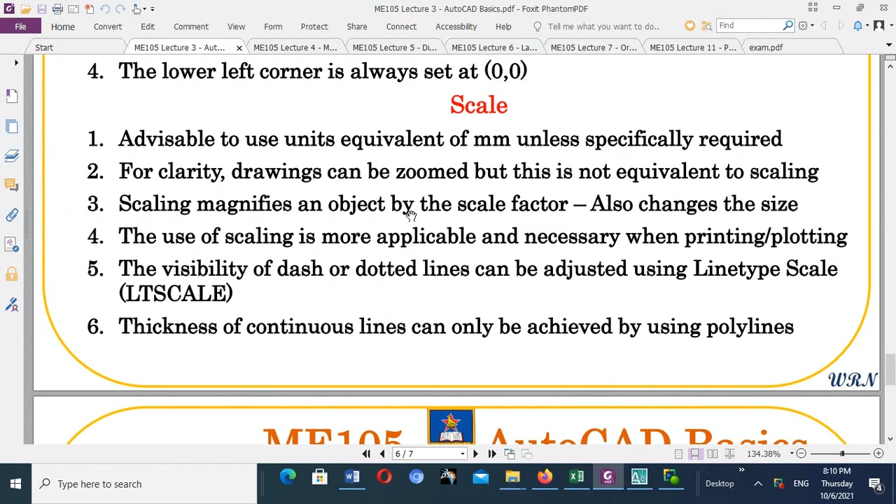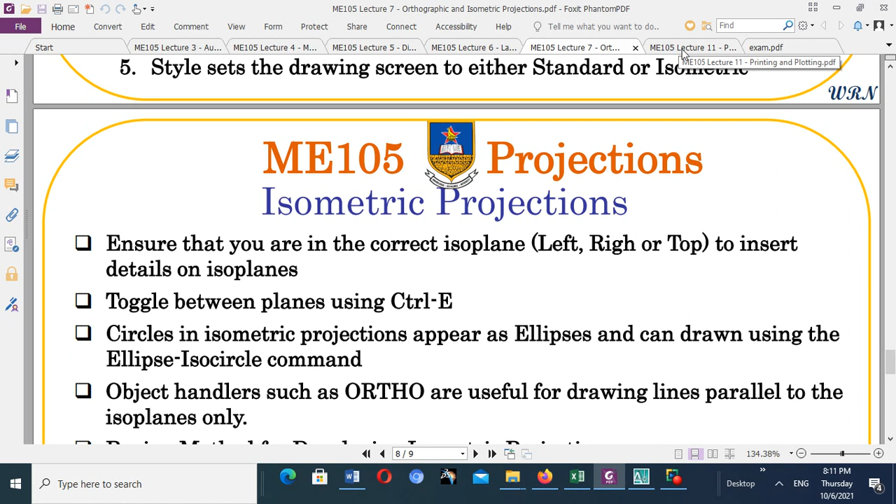We want to proceed with our learning from the last tutorials. I think I gave you 2 tutorials. So we will continue. Most of the things we discussed are in the PPTs that I sent, which should guide you: lecture 3, lecture 4, lecture 5, lecture 6, lecture 7, lecture 11. So we will try and make sure we cover this, show you on the PPT and also go on AutoCAD itself.

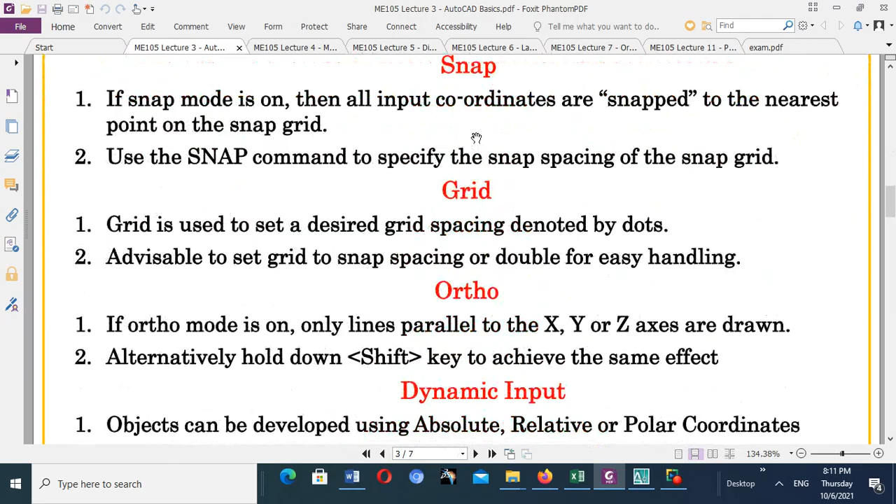So most of these things I talked about. I talked about this window, the AutoCAD screen. Then the display, keyboard, your mouse, the left hand button, right hand button, and the middle button. Snap on. You try these keys and see the effect: snap on, snap off, grid on, grid off, ortho on, ortho off. And these notes may also tell you more about those menus.

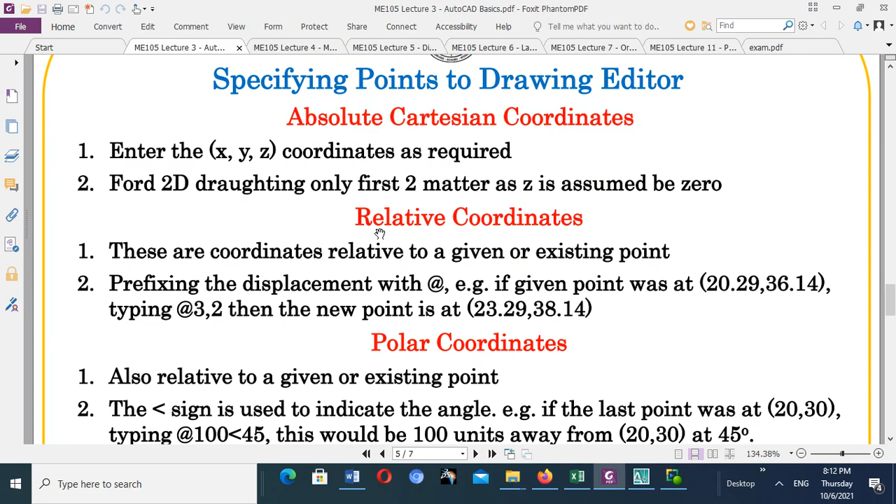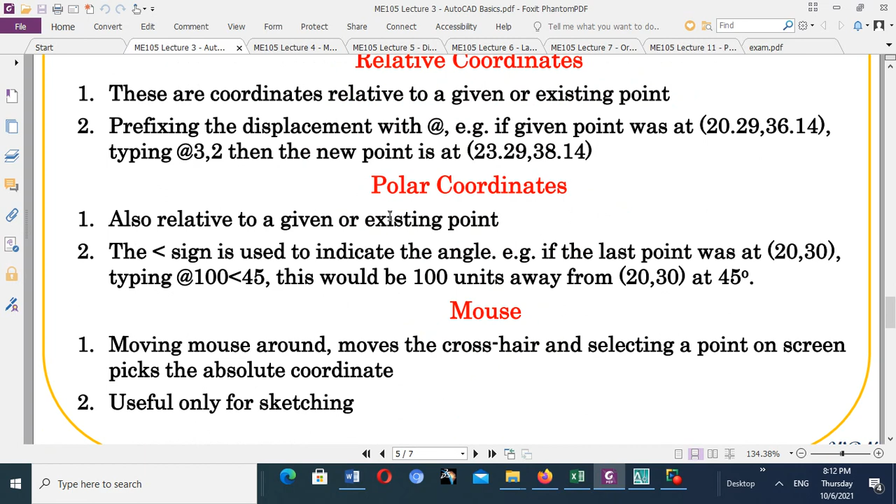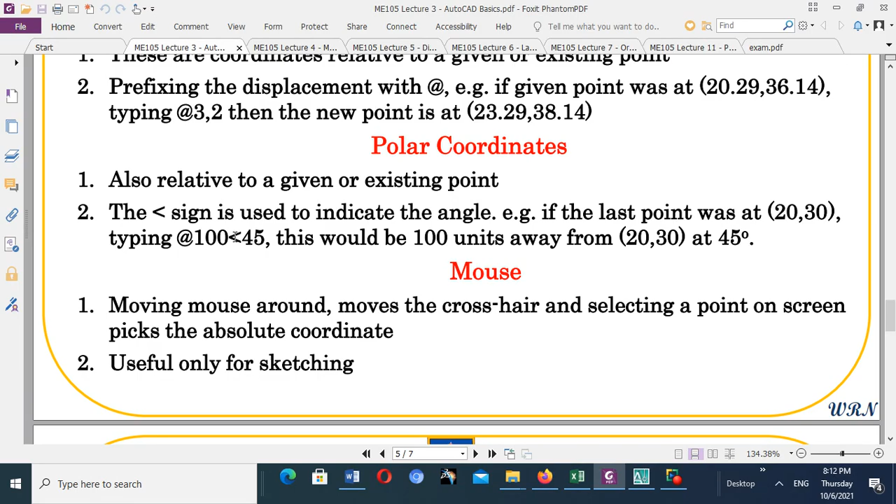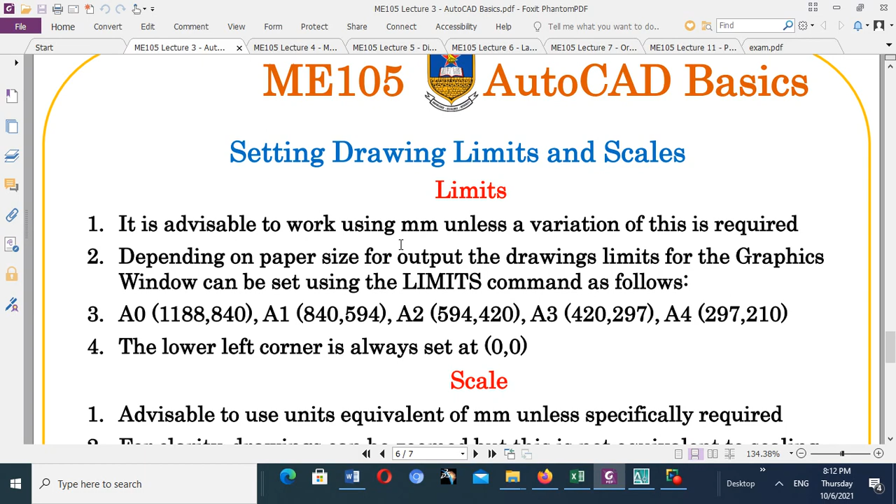Then there's specifying points, drawing editor, absolute Cartesian coordinates, relative. I showed you how to draw relative where you use the @ sign and then put your coordinates. Then polar coordinates: @100, where 100 is the length of the line, then the smaller than sign, 45 means angle 45. Right? Then limits. Normally we set limits according to the overall size of the drawing we want to draw.

But you can just draw straight without putting any limits, because you adjust your drawing according to the paper size that you choose. But anyhow, you must know these limits. If you want to set an A4 size, these are the coordinates of the upper limit. The lower limit is always 0, 0. A4 size is 297 mm by 210. A3 is 420 by 297. Then A2, A1, A0, maybe for plans.

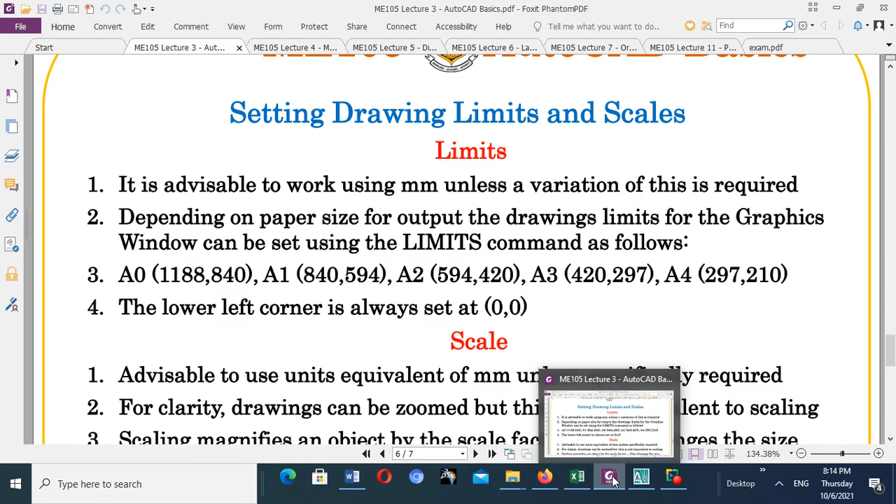So if you want to set a limit, you go to AutoCAD and write limits in the command prompt. Press enter. It asks for the lower left corner, 0, 0. You press enter. The upper limit default is 420 by 297. If you want 297 by 210, you type it and press enter. It becomes your paper size. But as I said, you don't need to do this. You choose your paper size at the printing stage.

Same thing with scale. You normally draw at 1:1, and then you scale according to your paper size. Saving your drawings in AutoCAD: you can save so that it can be opened by AutoCAD itself, or in other software like Paintbrush, Windows Metafile, Encapsulated PostScript file, American Standard Code for Information Interchange. These are the formats by which other software can open it.

Normally I use manufacturing software like Mastercam, so you want to save it in a format which Mastercam can open. Sometimes you want to save it in a format for a special type of printer, maybe stereolithography, that the printer will accept. So if you come here, say we had drawn something like this, right? This is our drawing 12575 surface.

So here are the file types, right? This is AutoCAD 2007. It doesn't have many types, but this DXF is interchangeable with other software. So if you want it opened in other software, you save it as DXF. Then DWG, that's the AutoCAD format; the AutoCAD file will end with DWG. But DXF is for interchange with other software, right?

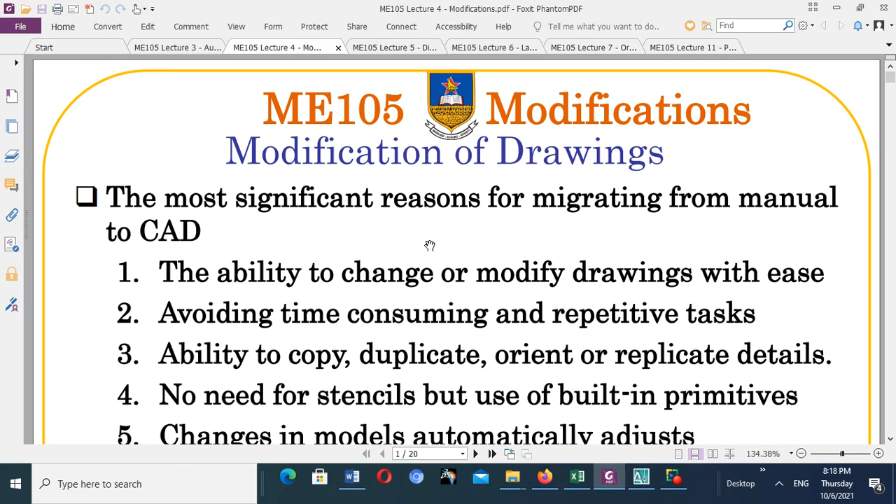And we go back to our PPT. So that's about it for this slide. We go to this one. On this slide we did quite a lot about modifications. I still want to practically introduce you to those which I left out. You as engineers, your IQ is very high. We introduce you a little, then expect you to discover on your own. But let's tackle other modification commands. So we go to AutoCAD.

First one is erase. We press erase, select object, this object. I've selected, then I press enter on the keyboard, and it's erased. See? You don't have to use a rubber like in manual drawing, which is old-fashioned. Copy, we talked about copy. Mirror, we talked about mirror. Offset, we did. Array, I think I did array. Move, rotate, we did.

And as I was saying, you can team up as friends, you practice these things. If you have got any problems, inbox me, phone me. I will always be there to help you.

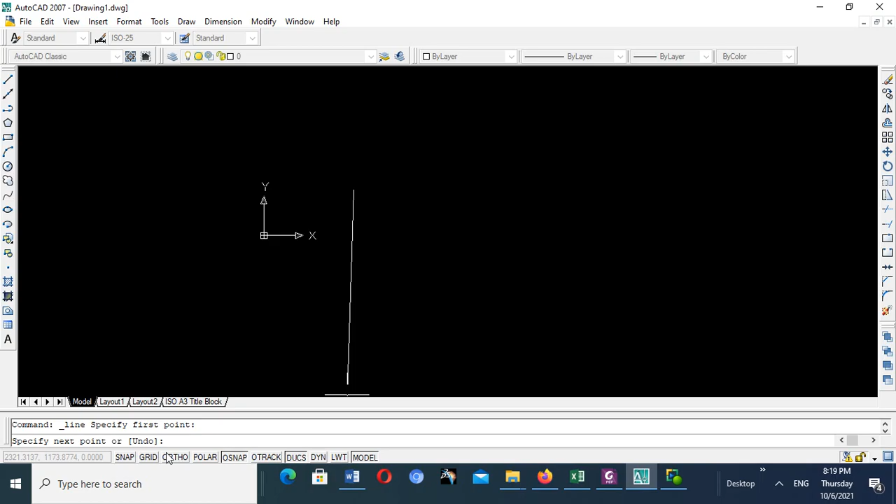Scale, stretch, trim, we did this. Break, maybe break we didn't. So if we draw a line, this is a straight line, we put in ortho, ortho on, this is our line. Alright, this is one entity. If I break it, if I try to highlight it after breaking, it will highlight two entities.

So I go on break at point. Select object to break. Select first breakpoint. See, it's showing osnap is off. I put it off. Then I just select this break, or even by the cross here, by one of the hairs, I just click it.

Then I try to find out if it's really broken. You see, this is now being highlighted separately from this one, so it has been broken by using this command called break at point.

Then there's another type of break. You see this break, it broke a line, but they remained coincident and they meet at a point. But if you break with this command here, you break in such a way that there's a gap left in between. So let's try that.

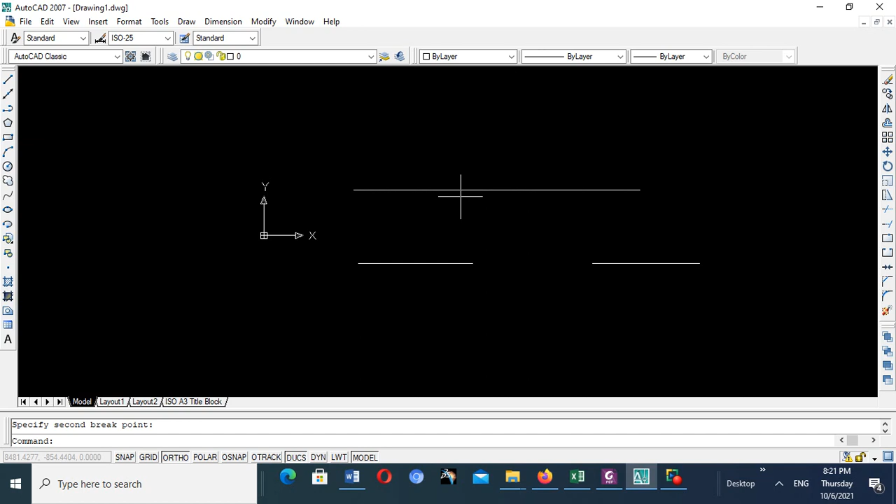Command break. And there's this command called join. We remember we broke these two lines. Let us say we want to join them again. So we click join. Then they say select source object. This is our source object. Then they say select lines to join to source. This is the line to join to source. Press enter. You check, it has become one.

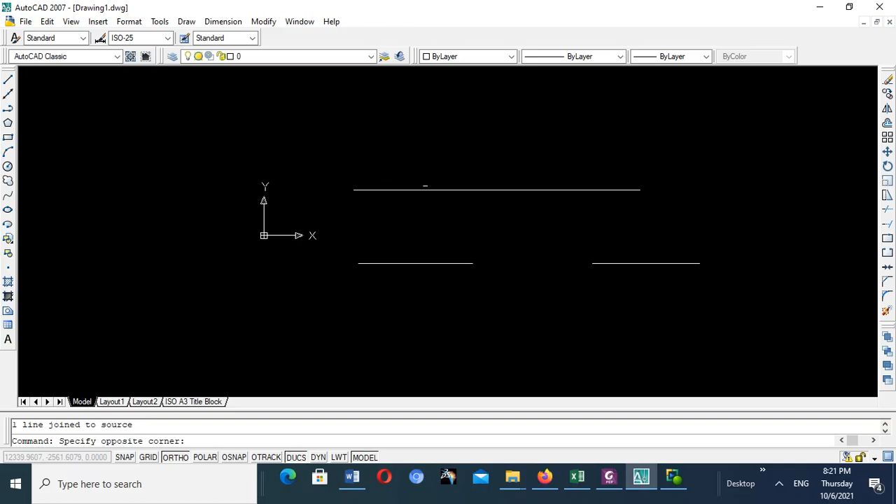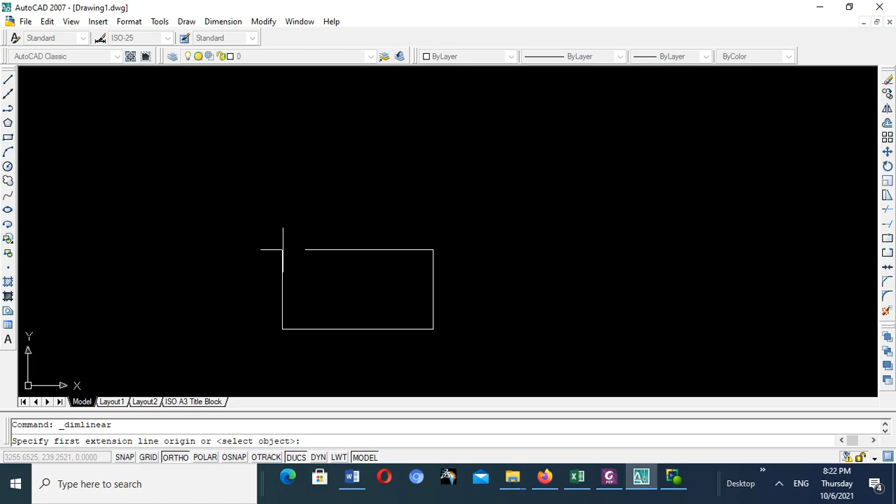That's how we've gone through join. So we delete this. We've learned our lesson. Then let us say we have got a rectangle like this, right? Let me try to see its approximate size. I've just drawn it. Yeah, it's about 900 something, right? Good. So I zoom it for size.

So we want to try this. This is our rectangle. If you want to chamfer this corner here, or you want to fillet this corner here, this rectangle has to be exploded so that each side is not joined to the other. It's independent. So use this command called explode. Select objects. This is the object I want to explode. Then I say enter. If you check now, each side is on its own.

Now we can do these operations, chamfer and fillet. Already we have learned what explode is, right? So let's go. Chamfer. Then they say select first line or undo or polyline or distance or angle or trim or method or multiple. So you see, they guide you to the type of chamfer you want. The popular one is D.

So you go D. If distance, you just type D. If it was a polyline, you type P. If it was undo, you type U. If it's an angle type of parameter, you type A. If trim, you type T. If it's method, you type E. If it's multiple, you type M. So we'll go D. This I leave you to practice. You try them out: method, multiple, trim, type of chamfer, right?

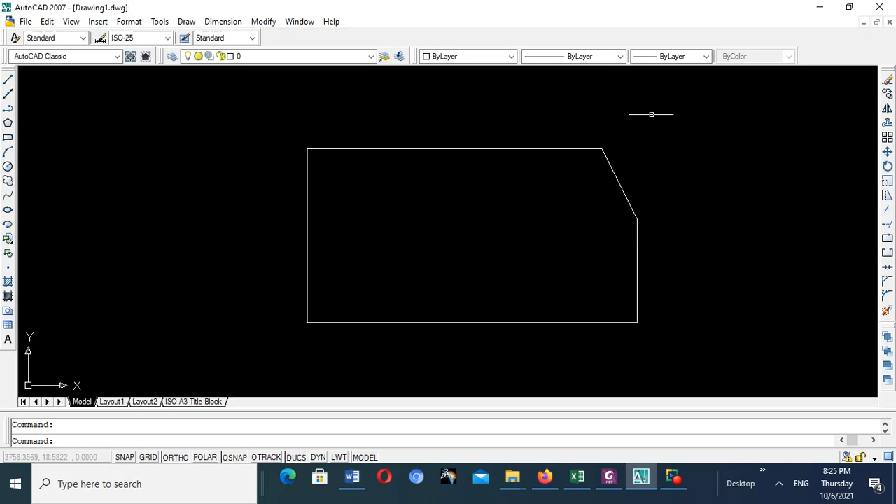Now remember the distances that we chose. The 100 is from the corner that was deleted to this. The 200 is from the corner that was deleted to this. There is your chamfer, right? So you can undo that. You can just press U, enter on the keyboard, right? Then you want to practice fillet.

So many types of fillets: undo, polyline, radius, trim, multiple. The default which is already there is a radius type of fillet, and the radius is 20.

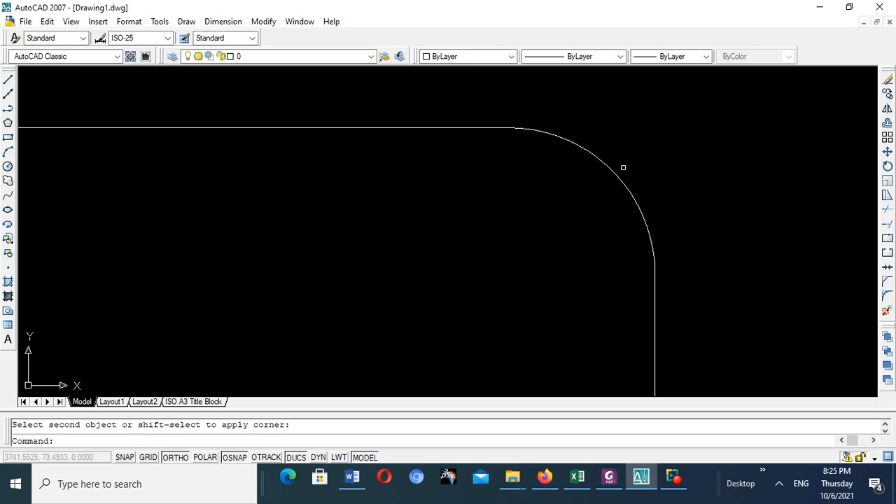So let us say we want to put a new radius. Type R and we put a new radius. Say our radius is 200 or 100. Enter. Then we select the first line, select the second one. There is our shape, our fillet, sorry.

Right? Good. So you can undo fillets. You press U on the keyboard and press enter. U enter. Then you undo your fillet. So we have learned all this.

Then you want to learn extend. You delete this. While we are there, I want to teach you something. There is an icon here written region. What does the region do? It joins the lines that are independent to make them one entity. So what you do, you just click region.

Say select object. These are the objects that I want to region to make them one. And I press enter. Check. Now it is one. And if I want to explode that, I just press explode. Then I select the object. This is the object that I want to explode. Enter. If you check, now it is exploded. Alright? So you have learned this is the opposite of this.

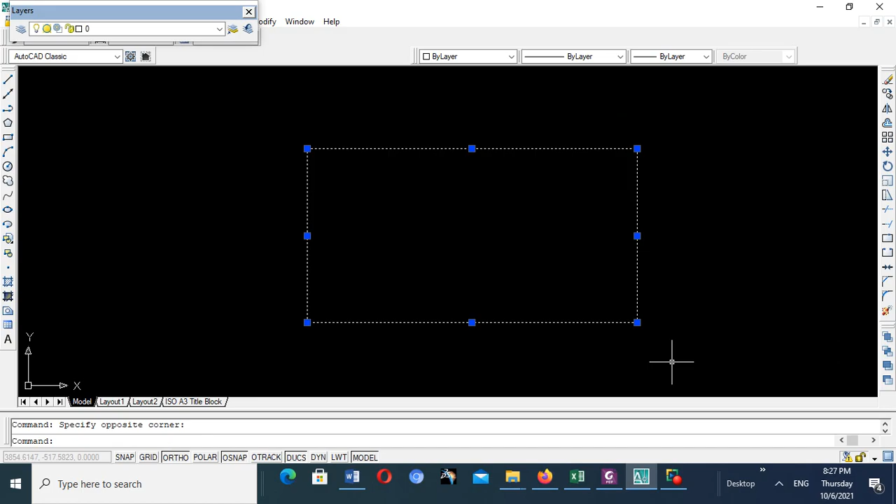Good. So we delete this. Then, last time I taught you trim. Today I'm going to teach you extend. So I will draw some lines here. I would like to draw a polyline, line, okay?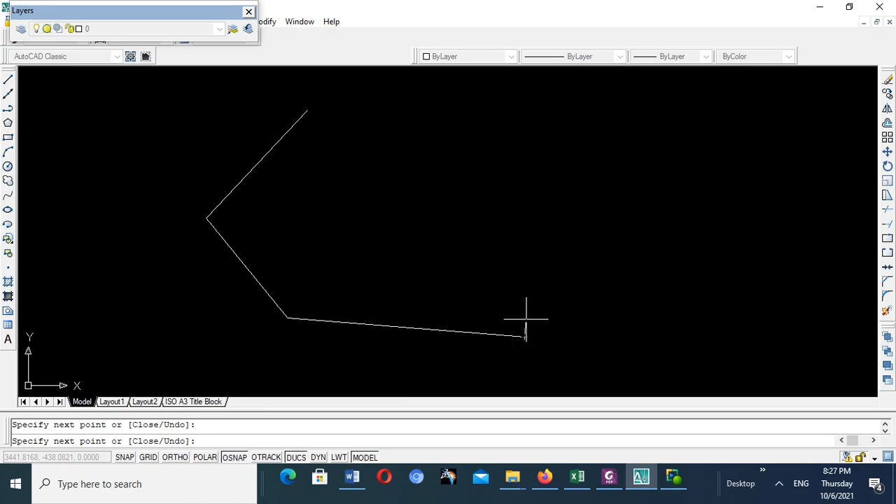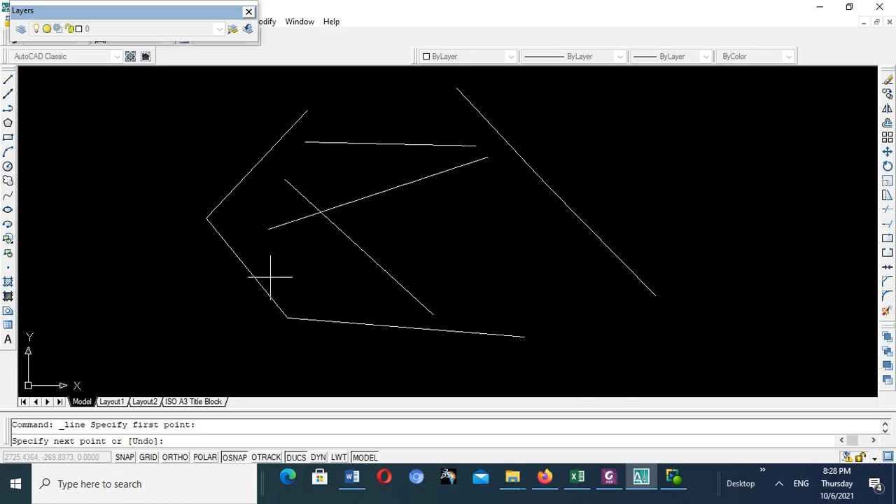So now let me remove this auto. And I draw another one there. And then like this. And I draw, and then draw another one there. And I draw another. Yeah, I want to illustrate this extend command.

Check extend. And it says select the boundary edges. So boundary edges are the lines to which the lines which are going to be extended are going to be extended to. So here is one boundary, is another one, is another one, is another one. So you press enter.

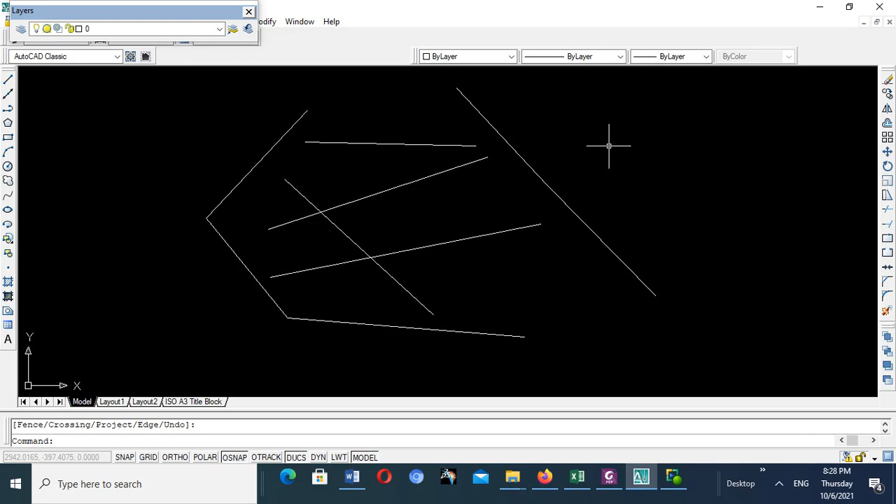Then you have selected your fences. No, let me start again. So we go extend, right? Then select the boundaries. These are the boundaries. This is where we put our extend limits.

So boundaries. Then they say select object to extend or shift. So I want to extend this line to that boundary. Boundary has already been extended. So if I want to extend this line to that boundary, I just click on the side nearer to that line. Then this will be extended. If I click here, this side will be extended to that one.

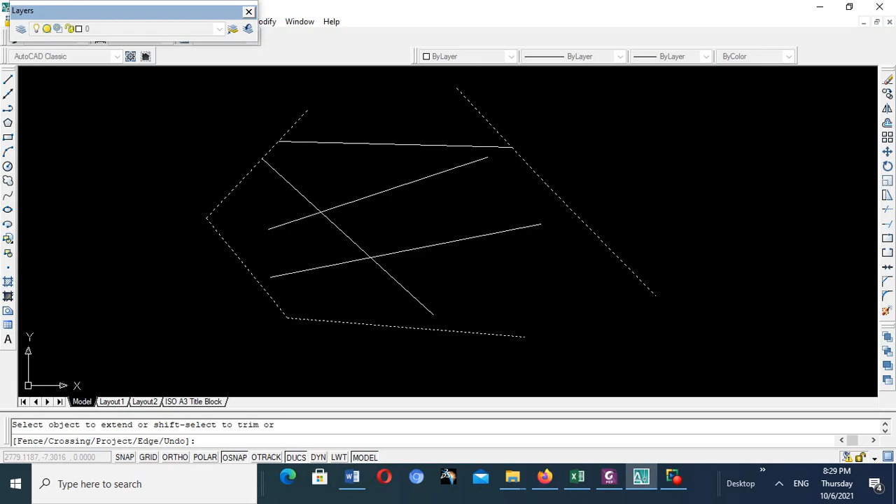If I click this one on this other side, it will be extended there. If I click it here, it will be extended there. Watch. This extension, this extension, this extension, this extension, this is our extension. You see? This is how you use your command extend, right? So come out with that command.

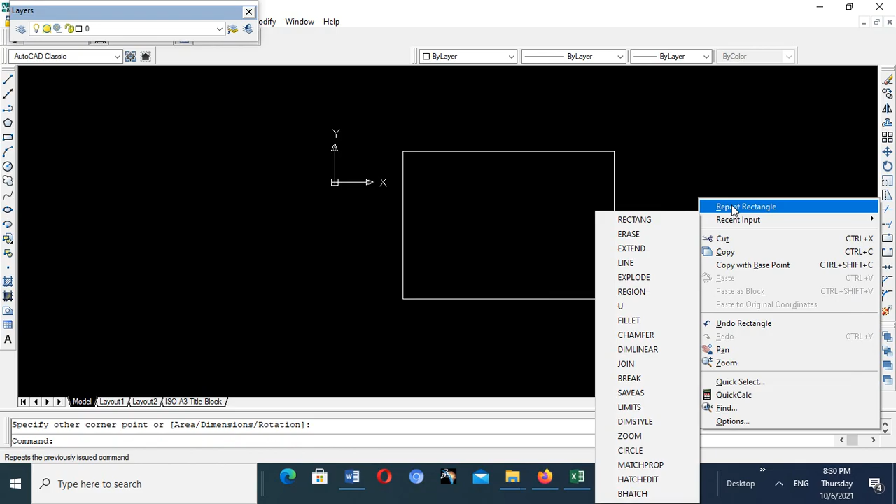So we have done our modification, most of the modification. Then we want to practice hatching. So we draw a rectangle like this. You know, hatching, you people did manual drawing. What is the purpose of hatching? I won't tell you, you should know that. This is what we call assumed knowledge, right?

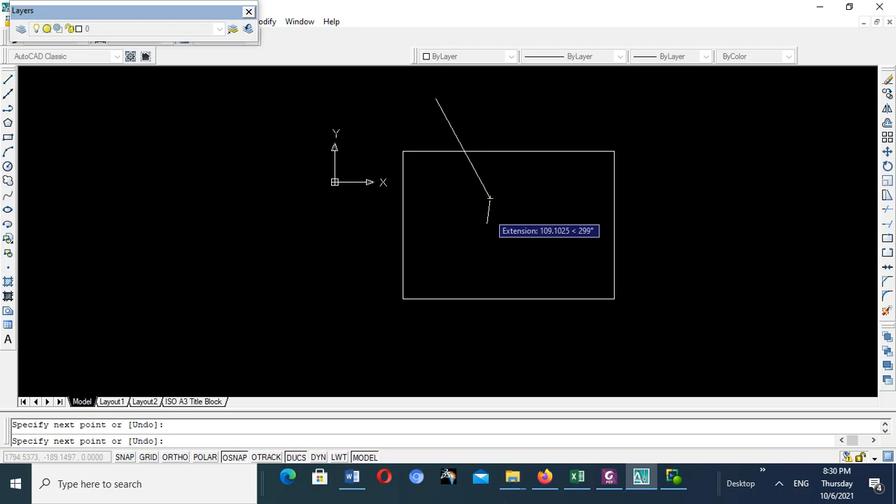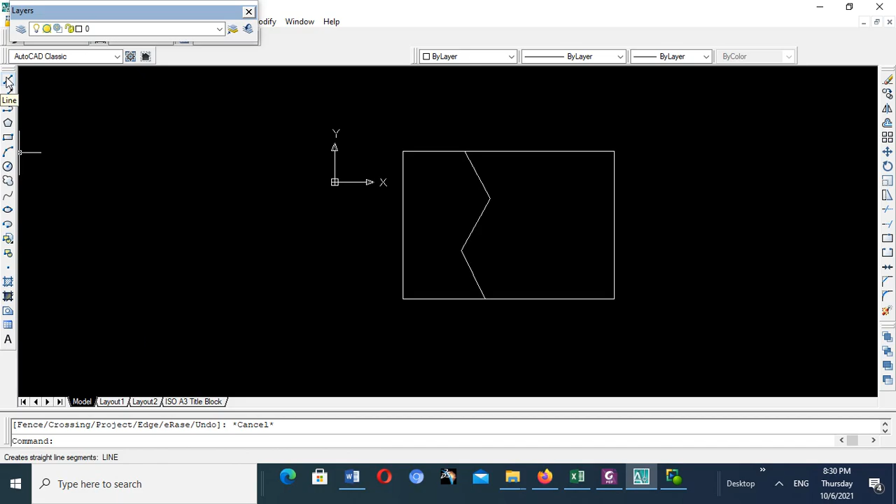Take this. Now, if you draw a line like this, let us say it was a little shape like this, right? Then I trim it, TR, and enter. I taught you how to trim, short command for trim, right? Then let us say there is another boundary here. Alright, then we use the command for trim, tr, and enter. Trim that.

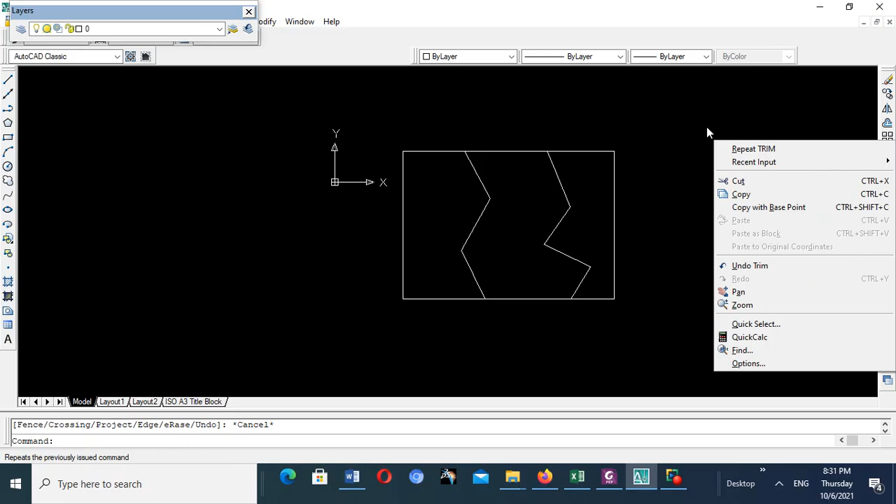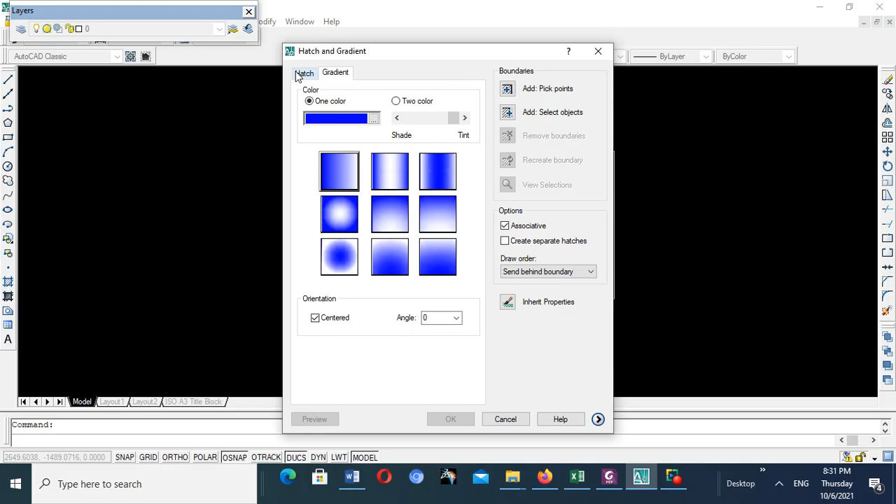Right, good. Then we want to practice hatching. So we go to here, the H icon. Then we go H. Sorry, what is happening? Yeah, don't know where that error came from. So if you click H, that H pop-up window comes. If you want to hatch, normal hatch, you can go by gradient, which is the gradient of colors. If you want to go by hatch, you practice this. So check this hatch. Alright, so there are so many hatch types.

You can click here and you see the types. This is the ANSI one, this is the ISO, this is predefined, other predefined custom where you make yours. So you choose from this. See the hatch type, and this is the hatch scale. I'll tell you how this is important.

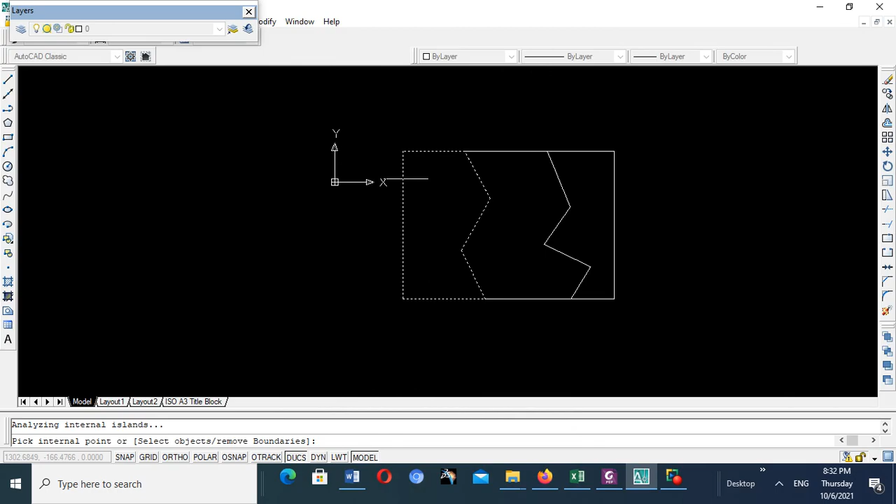Then they say add pick points, select objects. So if you pick points, if you pick this one and you pick this region, by the boundary it is going to be hatched. Then you press enter. You haven't finished. You have not yet selected the hatch type. So you can go here, you click the type, you can go from ISO, you go to other predefined.

Let us say you are an architect and you want to select a hatch for a roof. This is a roof type. This is a roof, this will be suitable for roof. For brick, you can show. For the mechanical guys, the hatch maybe use this to show a section of a shaft or an assembly. So let us use this architect one. Then I say okay.

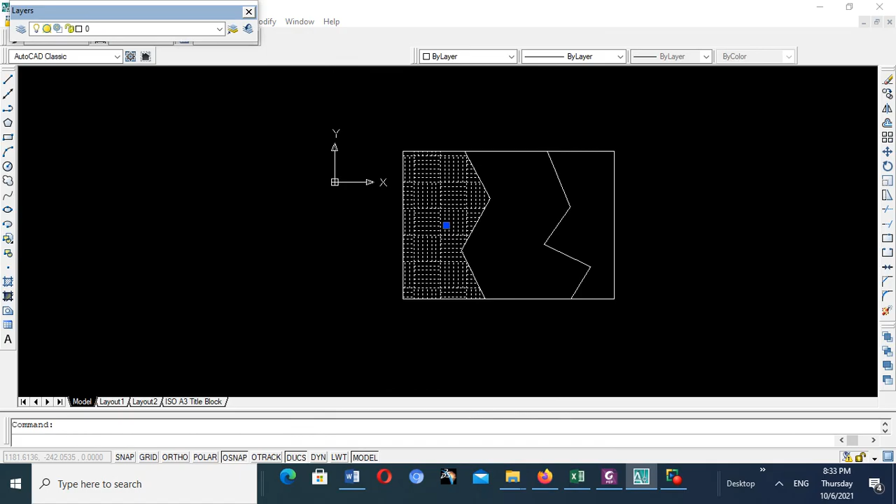Okay, there is your H. If you click it, you want to edit it and change its scale. Let's say you put a scale of 20. Say okay, check - the H becomes too big, like not an H anymore.

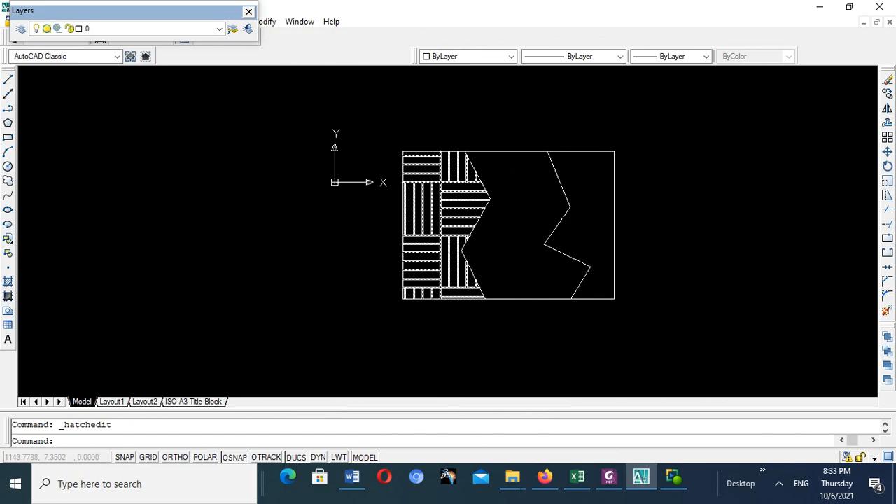So you click it again, then change the scale to a suitable one, to what it was set to. There's your H. I click again, it was on 1, I go 1, and I go okay, then it becomes nice, right?

Again, also H this part, so I click H. Let's say I just want to show you another type of H, so you select the pattern from this. If you go here, it goes by names - these names you might not know. Eighth, you won't know what an eighth is. But if you go to this section, you can see the type of H and the name associated.

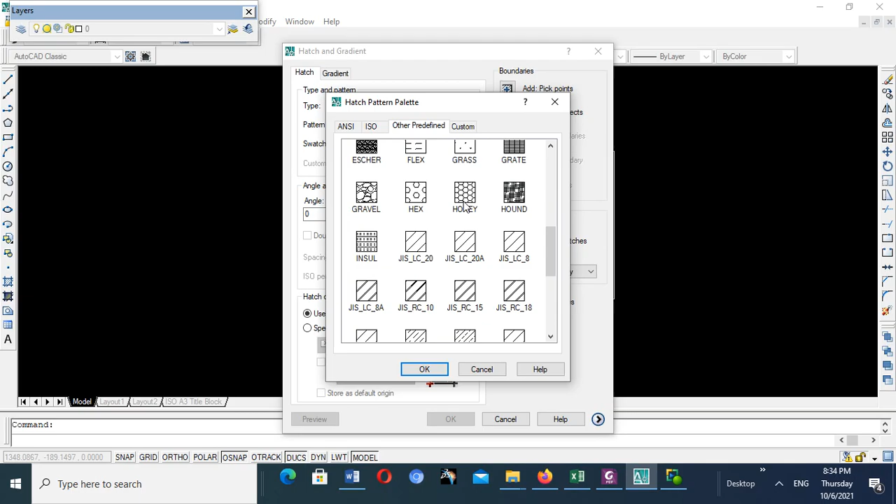Then we pick the points, we pick this region and press enter. Then we say okay, that is our H, but it's not good enough - you see the scale is not well adjusted, so it doesn't come out clear. So you double click it, the pop-up, the H edit will come.

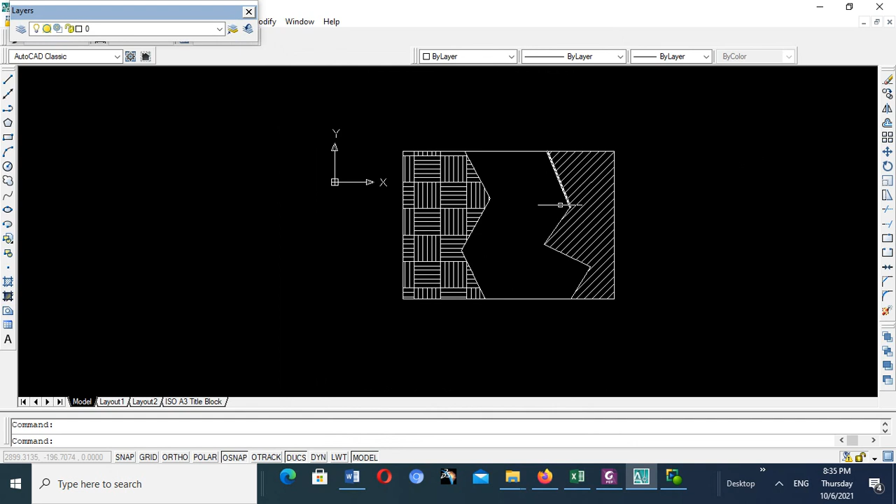Then you change the scale - this means the scale should change. If it's too small like that, you can make it a bigger scale. So you go okay, see how your H has come. Bigger scale, the more spaced the lines are. That's your H.

Practice, so we've done all this. There is no question about that. Modifications, the H we have done. Then there's something called the P-edit. Some of the things I would like to practice on your own.

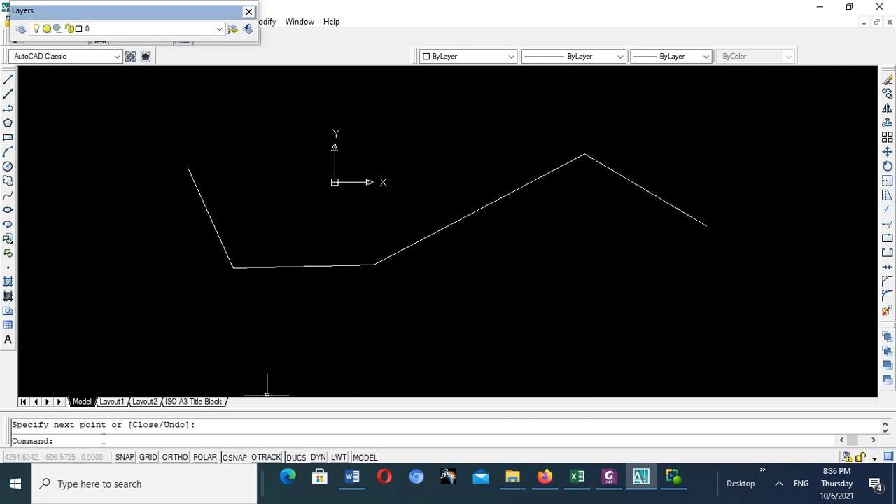If I have got a line like this one, see, these are lines that are co-joined. But let's say I want to convert it into one polyline for some reason of application. So I write p-edit, p-edit, enter. Select polyline and just select the first one.

Do you want to turn it into a polyline? Yes. Then I go enter. Enter the option - there's close, there's join, there's width, there's edit vertex, there's fit, there's spline, there's decurve. All those, if you are going to go deep into AutoCAD, make a practice of them. But we want to use the popular one, join, which is J.

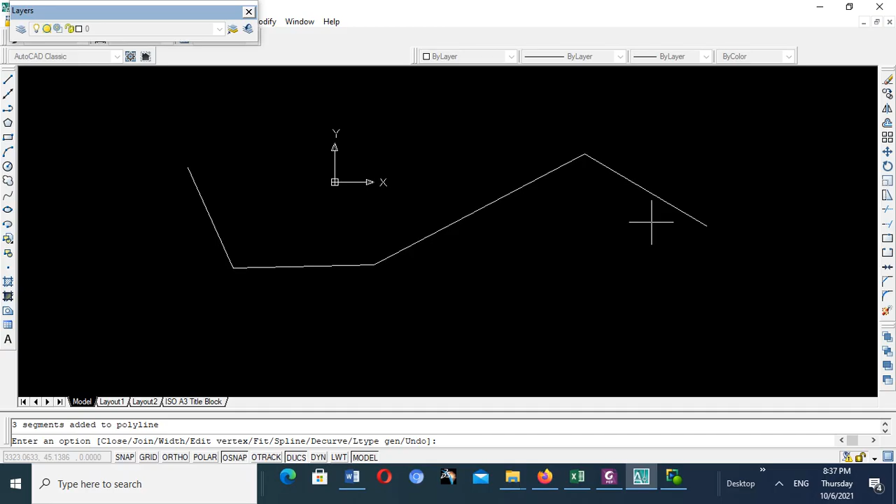Enter. Select source - this is the source. Select objects - these are the objects I want to join to the source to make it one line. Check now, come out of that. I try to highlight it - it is one line. So that's the p-edit command, which has converted this line into one. Right? So we've done quite a lot of practice.

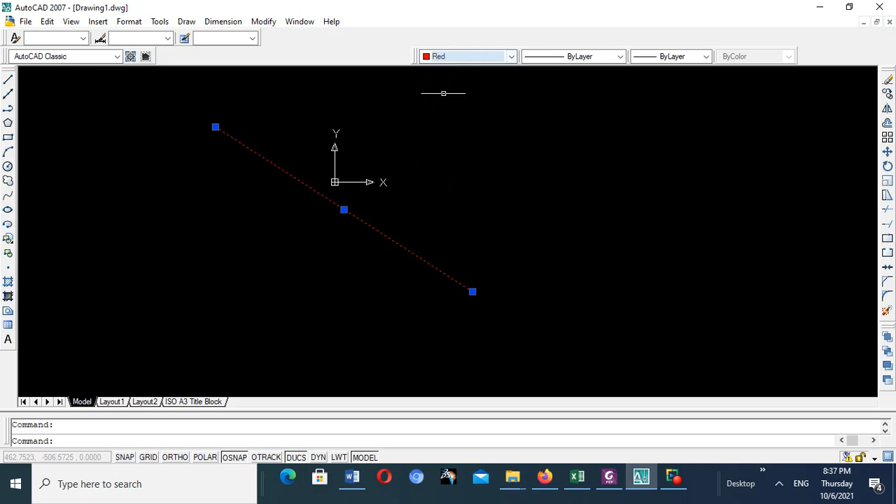So with this, then there's something called match property. You find it here. What is this? Yeah, match property. Let's say I have got a line here, right? This line is red in color.

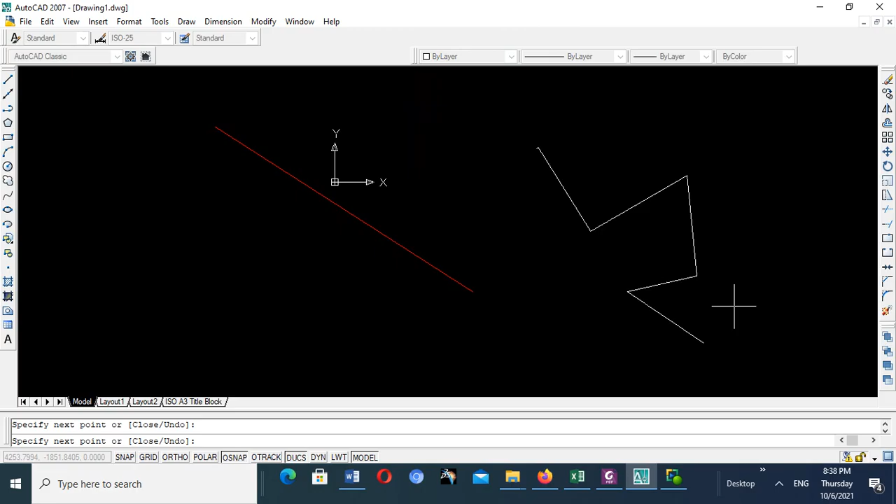Then I draw another line somewhere, which is not the same color as that one - it has different properties. So I want this line to be red, or this one. If I want to change it to have the same color as this one, I can use the match property command. So you go to modify, then press match properties.

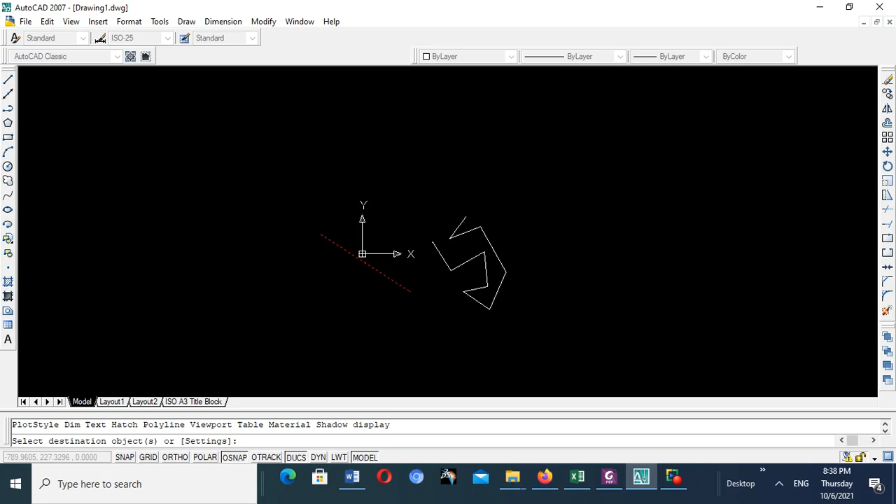Select source, this is the source. Select destination, this is the destination. This is another destination, this is another destination. You see, they are already taking up the property of the source. Taking up the property of the source. Enter, it's match property. Right?

So with this, you practice some more. Your 2D must be good enough now. You know how to hatch, you know how to erase, you know how to chamfer, you know how to join, you know how to break, you know how to trim, you know how to extend. 2D is the basis of all drawing.

So with that, we call it quits to 2D. So make an effort to practice that. Then we might as well want to start a what do you call it, 3D. So our next lecture will start straight away into 3D modeling.